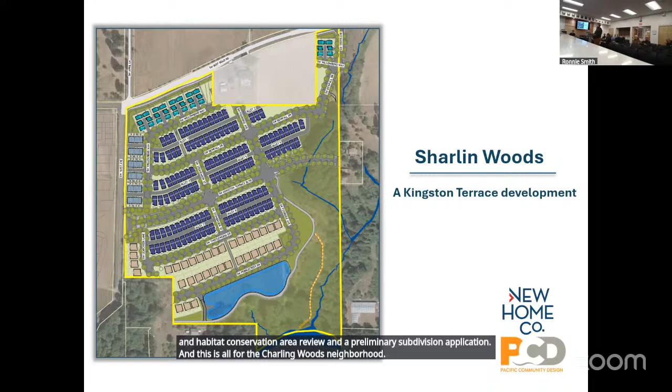Next slide. The Sharlin Woods planned development is located in the Kingston Terrace Master Plan area, south of Beef Bend Road and east of the Town Center neighborhood, as you can see here. Tax lot 100 in the northern portion of the site is not included in the development. However, we have provided a conceptual shadow plan illustrating how future redevelopment of the tax lot will provide street extensions and home construction that complies with the Kingston Terrace Master Plan and regulating plan in the code, and will meet the density requirements. Next slide.

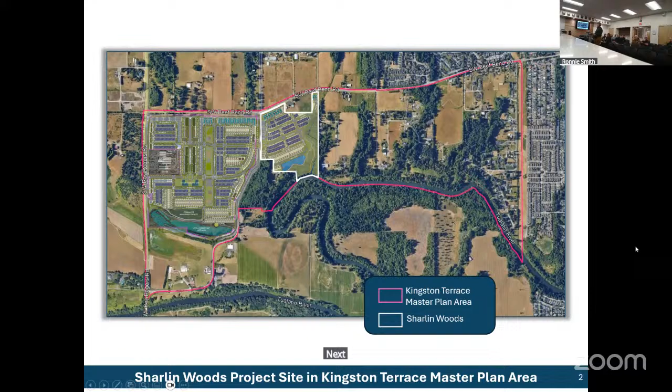The site includes 2 zoning districts. North of the east-west collector is zoned the Beef Bend neighborhood, which has a minimum net density of 18 units per net acre. Full build-out of the site, including tax lot 100, will result in a density of 19 units per net acre, providing 149 homes. South of the east-west collector is zoned Central neighborhood, with a minimum net density of 10 units per net acre. The proposed development will provide 80 homes in this area, resulting in a density of 11.9 units per net acre.

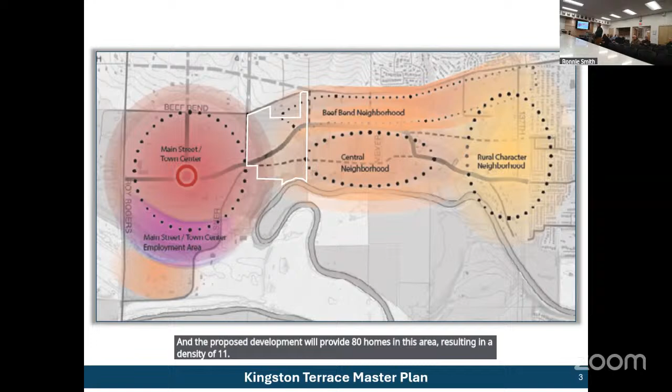So this rendering illustrates how development of Sharlin Woods is designed to seamlessly connect to the Town Center neighborhood and provide safe and convenient pedestrian, bicycle, and vehicle access. The east-west collector, Kingston Terrace Boulevard, will be extended from the roundabout at Elsner Road through the neighborhood to the eastern boundary of the development.

The proposed development provides 223 homes and 6 lots for future development on tax lot 100. The neighborhood is designed with the highest density of homes along Beef Bend and Elsner Road, with a transition to larger family homes in the southern portion of the development.

You'll also see the image of the existing natural resource corridor, which has been integrated into the neighborhood to offer an open space amenity while minimizing impacts to that tributary.

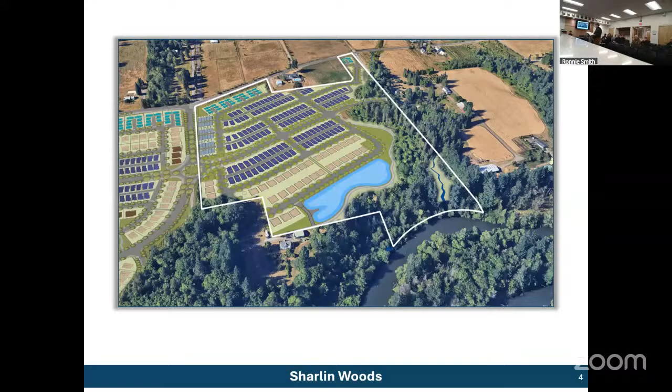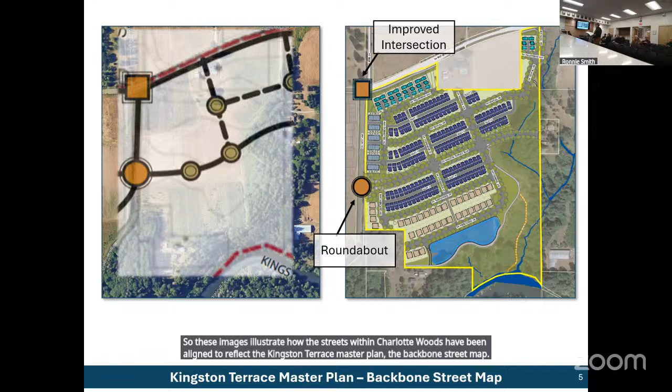These images illustrate how the streets within Sharlin Woods have been aligned to reflect the Kingston Terrace Master Plan backbone street map. We have the roundabout at Elsner and Kingston Terrace Boulevard, and improvements to the Elsner and Beef Bend Road intersection, which will be constructed in Phase 3 of the Town Center neighborhood. The development also includes segments of the Kingston Terrace Boulevard east-west collector and two neighborhood routes.

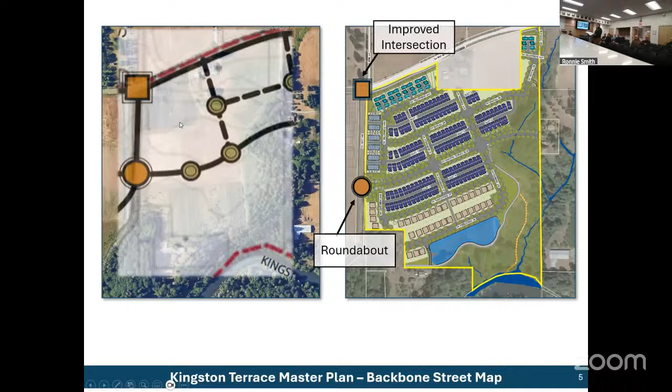In addition to the linear green along Beef Bend Road and the multi-use trail, Sharlin Woods is designed to provide a complete pedestrian and bicycle network. Six-foot wide sidewalks and a cycle track are provided along Kingston Terrace Boulevard. We have mid-block access ways and sidewalks along the streets and between the row homes and cottage-style homes that will provide comfortable multimodal access throughout the neighborhood.

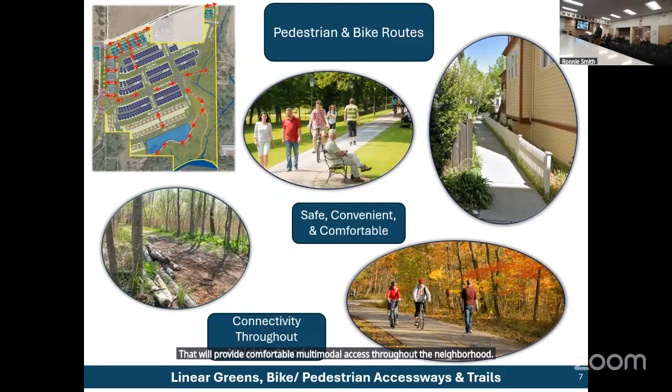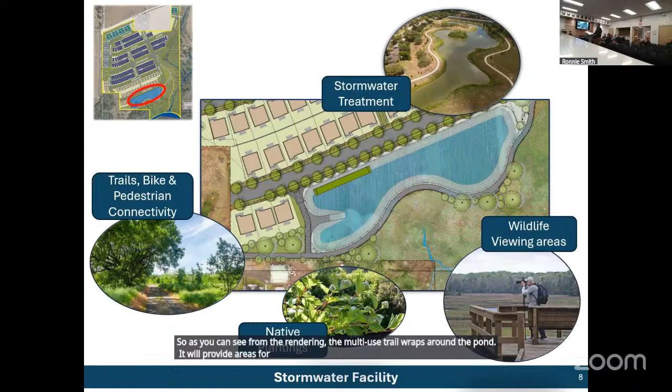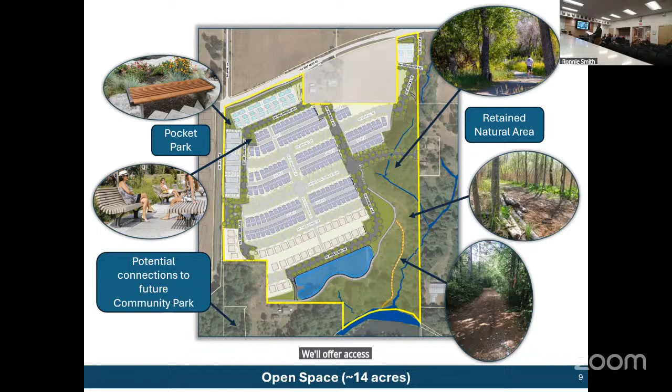As I mentioned, the neighborhood will provide 223 homes. The 30 cottage-style single detached homes are located along Beef Bend, highlighted here. These homes range in size from 1,200 to 1,300 square feet, and each home has a one-car garage.

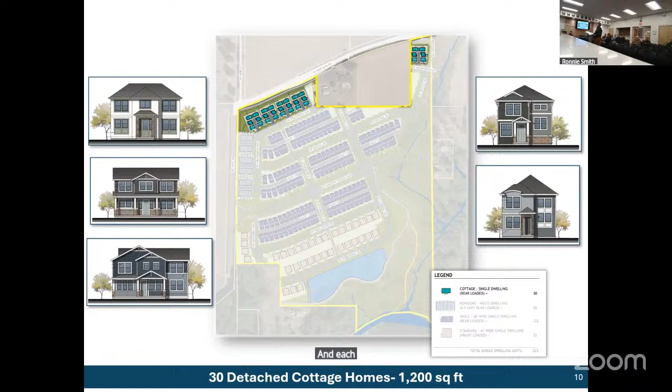As we discussed, these homes are designed to promote a pedestrian-friendly environment. The homes front one another to create common open space with pedestrian access.

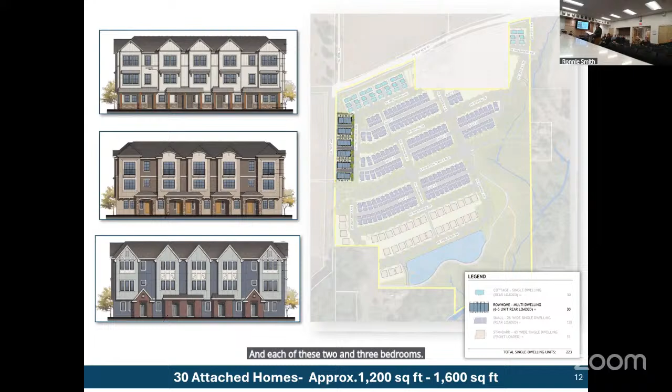The neighborhood will provide 30 row homes located along Elsner. These are 3-story row homes, approximately 1,200 to 1,600 square feet. Each of these 2- and 3-bedroom homes has a 2-car garage. The row homes are also designed to promote multimodal access; similar to the cottage-style homes, the primary entrances front each other to create convenient and comfortable pedestrian access.

We have 128 alley-loaded single detached homes located in the central part of the neighborhood. These 4-bedroom homes also have 2-car garages. With vehicle access taken from the alley in the rear of the home, driveways are eliminated from the public streets, so the sidewalks remain unobstructed.

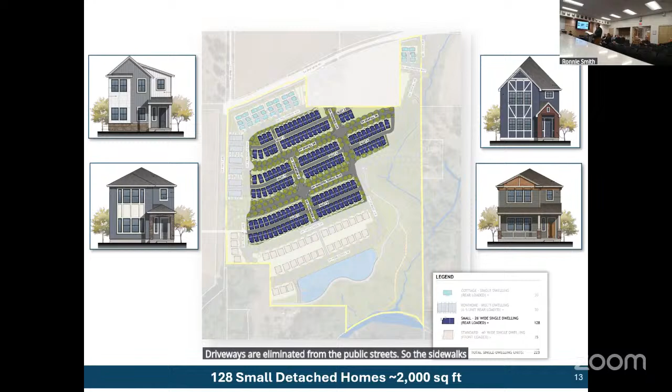We also have 35 larger front-loaded homes provided as a transition between the higher density development and the natural open space. These homes are approximately 2,800 square feet, and each home has a garage. We feel that the variety of home styles and elevations provided in the neighborhood will create an attractive and desirable development.

For the standard lot detached homes, do people have a driveway on those? Those are front-loaded, so they do have the driveway in the front. Okay, so is that what front-loaded means? Yes. Thank you, okay good.

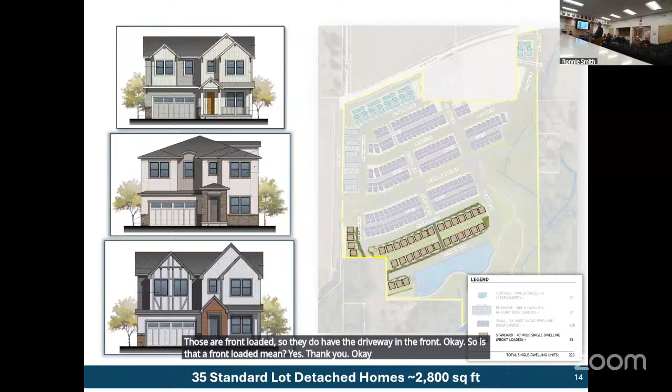So development of Charlotte Woods will include improvements to Beef Bend Road. The improvements include a 10-foot wide linear green tract between the cottage-style homes, providing a buffer between the front yards and the roadway. We also have a 12-foot wide multi-use path that provides multimodal access along Beef Bend. And a planter strip with street trees will improve the pedestrian experience along this arterial. Full improvement of Beef Bend will occur with the build-out of River Terrace 2.0 to the north of the road.

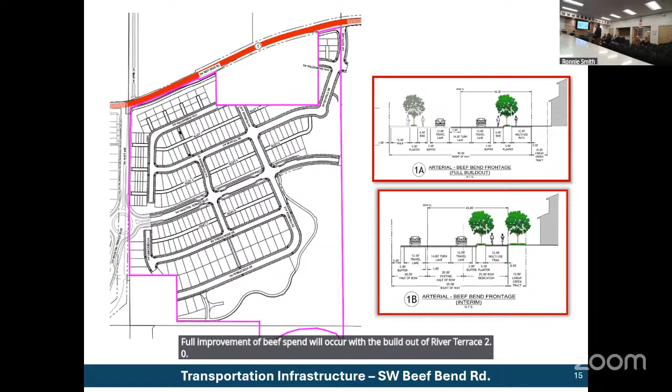So the primary east-west route through Charlotte Woods will be the extension of Kingston Terrace Boulevard. The collector road has been designed to slow traffic, promote pedestrian and bicycle safety, and lessen impacts to the natural resource corridor.

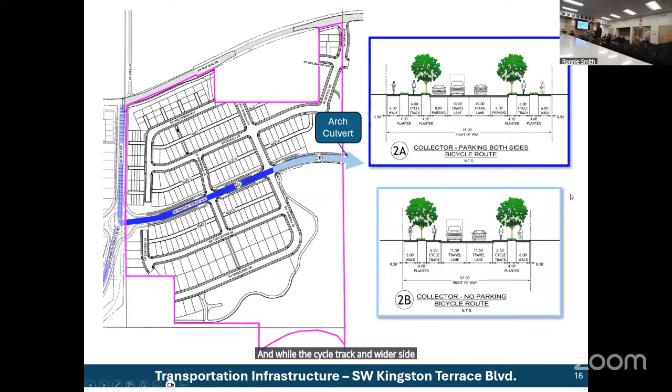The road includes a 6-foot wide sidewalk and a separate cycle track, which offers bicyclists a safe and comfortable route along the collector. On-street parking will provide an additional buffer between the vehicle lanes and the cycle track and sidewalk. To minimize impacts to the natural resource corridor, a narrow street section will be utilized where Kingston Terrace Boulevard crosses the tributary. While the cycle track and wider sidewalks will continue along this section, on-street parking will be eliminated right along the tributary.

And across the tributary, we are intending an open bottom culvert to be utilized. The photos here are of a similarly designed arch culvert located along River Terrace Boulevard. As you can see, the pedestrian and bicycle access is prioritized, with the on-street parking removed.

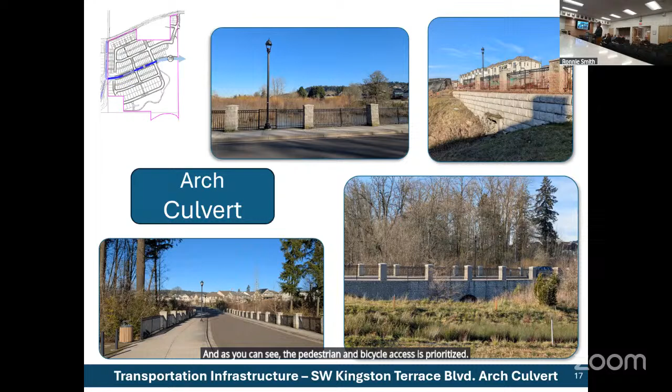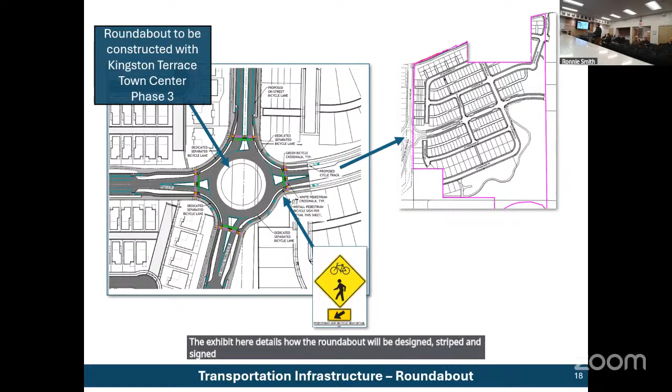The western section of Kingston Terrace Boulevard will connect to the roundabout being constructed with phase 3 of the town center neighborhood. The exhibit here details how the roundabout will be designed, striped, and signed for the safety of pedestrian and bicycle through traffic.

We understand the city's concerns regarding safety along the collector road. To help everyone better visualize the pedestrian and bicycle experience along Kingston Terrace Boulevard, we have a couple renderings. This first image provides a perspective of the street from the western end facing eastward. You can see the cycle tracks are separated from the vehicle lanes, and the wider sidewalk. The street trees, landscape strips, and front lawns fronting the street will signal to drivers that they are entering a residential neighborhood. With the bike tracks, that means there'll be no parking along that boulevard.

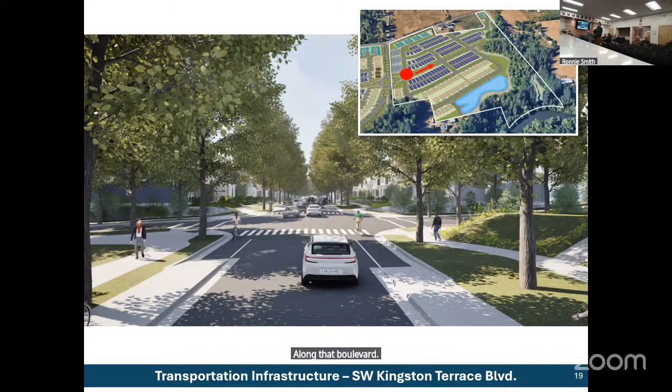Well, actually, if you can go to the next slide, Ronnie, this one. So you can see here how the cycle tracks ramp up, and there's still on-street parking, but you have the cycle track and then some lawn, some grass, and then the sidewalk. So the cycle track does continue along Kingston Terrace Boulevard, and we also offer the on-street parking.

The track, Gretchen, you can see that it kind of curves and goes in and out. Kind of hard to tell. So it's a continuous bicycle track, and the on-street parking actually provides that buffer between the moving cars and the bicyclists on the cycle track and the sidewalk, to provide additional comfort and safety.

Is the bicycle track raised to the sidewalk level, or is it? It is raised, those are ramps. Got it, okay. So it's elevated and separated from the vehicle traffic.

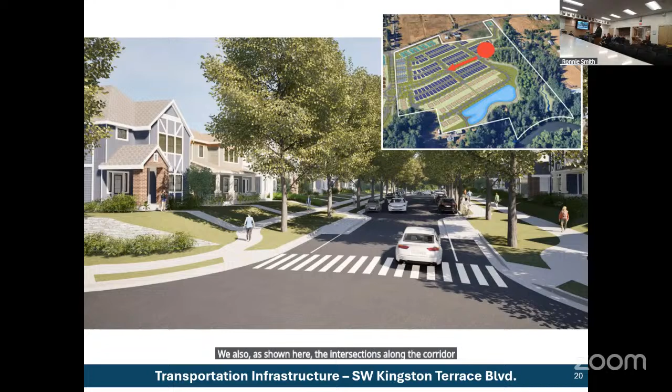Next slide, Ronnie. So wait, real quick, the pretty trees encourage people to slow down? Yes. Really? Huh, so making things pretty? No, that's cool. Huh, okay. We also have our traffic engineer here who can answer additional questions. I'm good. Okay, okay.

Okay. So Sherlin Woods also includes segments of neighborhood routes, and these routes shown here are highlighted in green. They also include pedestrian and bike facilities.

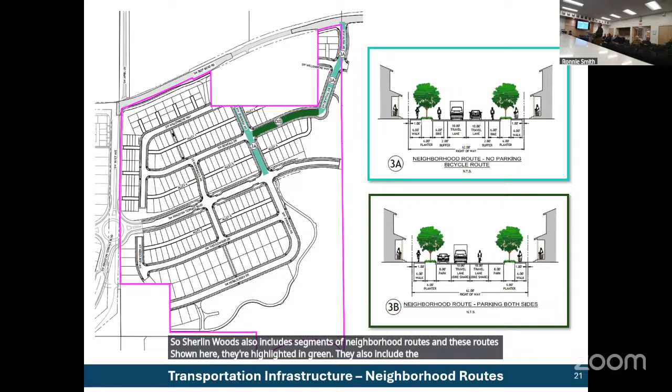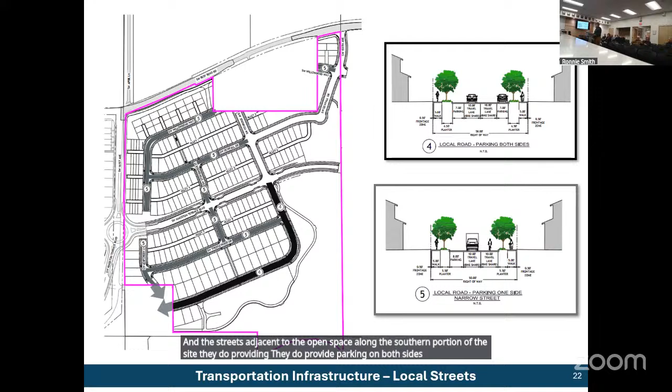This exhibit illustrates the network of local streets through the neighborhood. The streets adjacent to the open space along the southern portion of the site provide parking on both sides of the street.

How wide are the alleys? Previous slide, Ronnie. I believe it's 20 feet. Yes, 20 foot. 21 with the mountable curb.

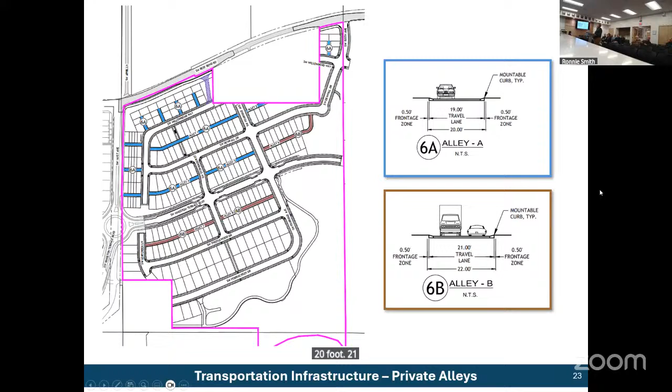New Home and the design team are very sensitive to the potential impacts to the wetlands and the natural resource corridors along the Tualatin River.

Last fall, our team met on site with King City staff and a representative from Tualatin Riverkeepers to examine the existing conditions of the site and discuss opportunities for potential enhancement and mitigation measures. The proposed development is set back from the resource corridor and includes improvements to the vegetated buffer. Our engineers and team of wetland scientists are here this evening to answer any technical questions you may have after our presentation.

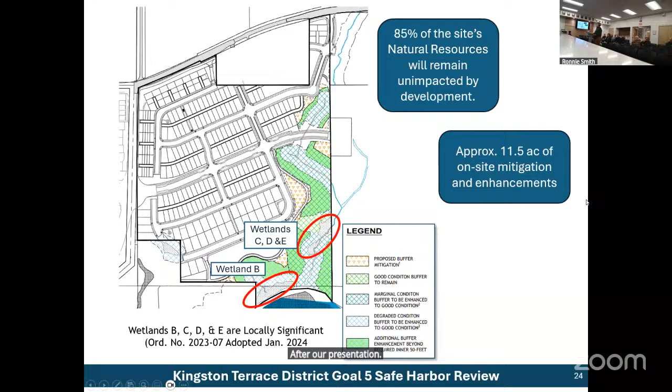The site is also mapped with Upland Wildlife and Habitat Conservation Area, the HCA. Therefore, we are seeking approval of an Upland Wildlife and HCA review. Most of the site has been cleared of trees for agricultural use. However, historical mapping identified over 256,000 square feet, or 5.5 acres, of upland habitat. So mitigation is required to offset impacts to that HCA area.

The planting plan for Charlene Woods neighborhood has been designed to exceed that mitigation requirement, as we discussed earlier. Trees will be planted in open spaces, including the stormwater pond, the vegetated buffer, and in the planter strips along the public streets. Native shrubs will be planted in the stormwater pond and vegetated wetland buffer.

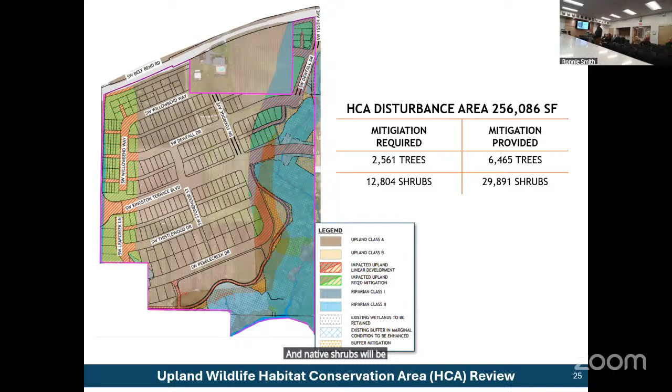The development also includes extensions of public utilities. Stormwater will be collected throughout the development and directed to the stormwater pond in the southern portion of the site. I know you all have technical questions regarding the conveyance and treatment of the stormwater, so PCD's principal engineer, Patrick Espinoza, is here tonight and happy to answer questions after the presentation.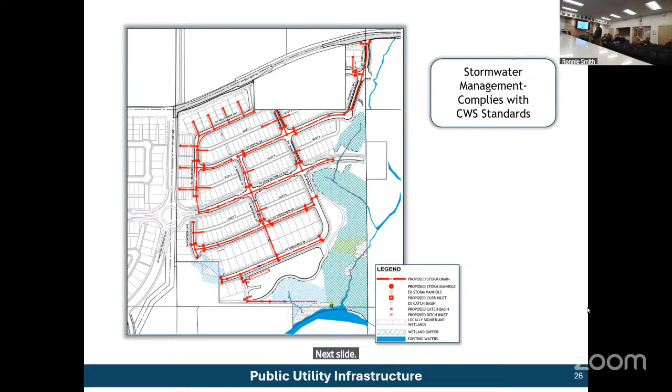The development also provides an additional segment of a 15-inch sanitary sewer main extended from the CWS pump station in the town center neighborhood. The main will extend from the roundabout at Elsner and run along Kingston Terrace Boulevard to the eastern edge of the development, which will eventually extend eastward to serve future development.

And then the next slide.

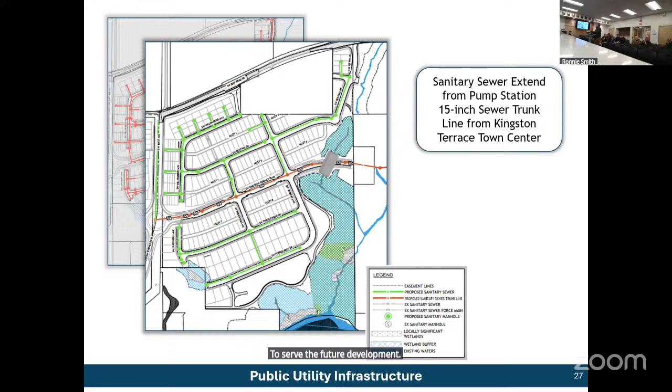Will a 15-inch line be sufficient for development a long ways, or is there going to be another pump station somewhere?

Patrick can help answer that question. They have done studies, and it's also dependent on the topography.

Last, we have the water line network. Here we show the water lines will be extended into the development from Beef Bend and Elsner Road. Water line will be constructed in Kingston Terrace Boulevard to extend eastward again to serve the future development.

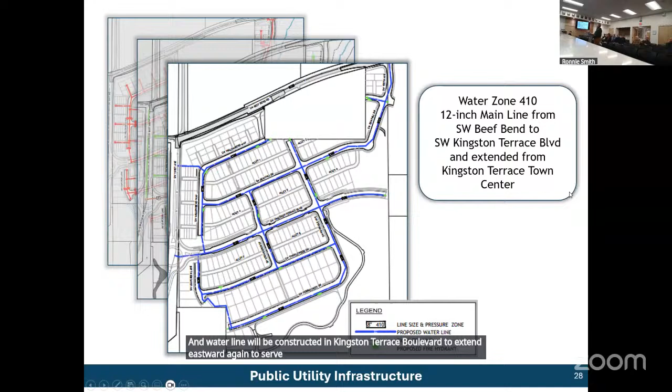And that's the end of our presentation. Thank you all so much for your time, and thank you very much, Max, for the staff report. It was great working together on this project.

We do have our civil engineers, transportation and geotech engineers, and our natural resource experts here to answer your more technical, detailed questions.

Commissioner Mitchell, did you have... I'm going to just come right down the line. Chair Boehner, how do you want to do this? I have like three different areas of questioning, so maybe I should do one and let others speak and come back. Would that be acceptable? Okay.

The first one involves the Upland HCA Wildlife Corridor requirements regarding the Fisher Road culvert being proposed. Based on my cursory look at the topography there where you're proposing the crossing, it looks like the crossing bank to bank might be in the neighborhood of 50 to 70 feet, and the depth of the tributary might be 10 to 12 feet. With that in mind, putting in an arch culvert that's bottomless, I'm concerned there won't be sufficient headroom or size for wildlife to pass through that—it'll be more like a very low tunnel. The road width at that location is like 57 feet. So my question is regarding what sort of wildlife passage can go through that sort of structure, and if animals like deer can't, then what's the consequence on mitigating—how do you mitigate that requirement? Thank you.

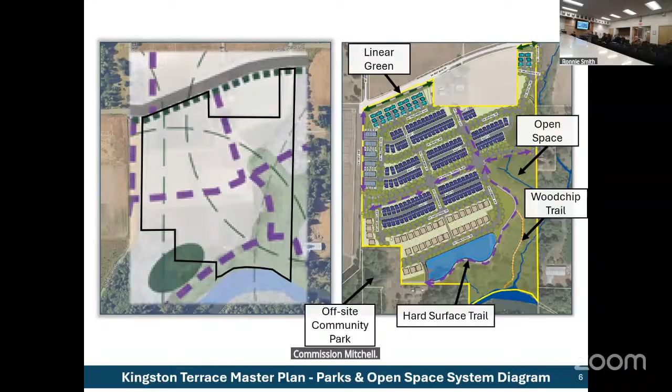Okay, thank you. On page 25 of your plan, the regulating plan, figure 161149, says it directs development in Kingston Terrace to be a bridge between King City's transportation system plan, the Kingston Terrace master plan, and applicable regulations of the community development and zoning code.

Now, that regulating plan map is pretty hard to locate things on. There's no dimensions on it. Furthermore, in the requirements, it says that certain streets can be moved 100 feet in any direction, and other types of streets can be moved 200 feet in any direction.

So what I'm leading up to is that the Kingston Terrace transportation system plan has a backbone street map, and it looks like, in retrospect, you have moved the location of the east-west Fisher Road crossing north of where it was originally proposed by the backbone street plan.